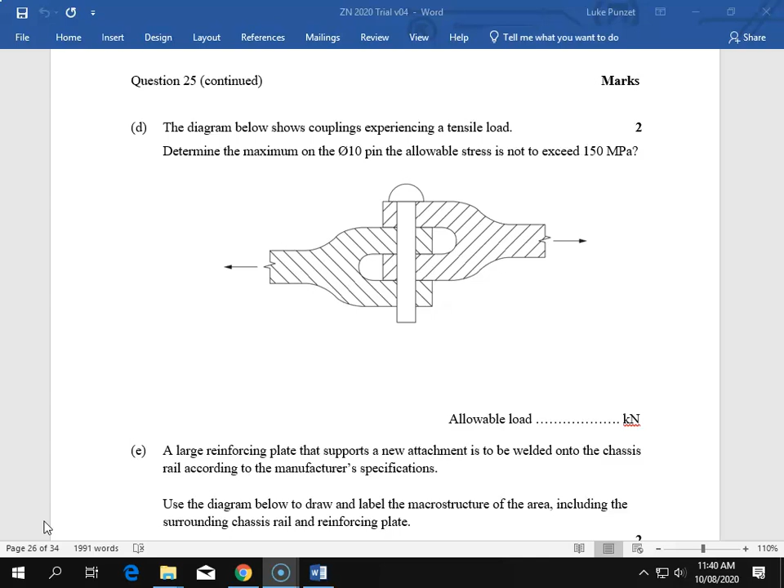Okay, so this question here was answered terribly. I gave you 1 mark if you did an attempt that was just not shocking. There was no one who answered this even close to well, but some people took an attempt at it, and I gave you a mark for labeling something, and I could see at least one happy face. Okay, so let's have a look at what the answer is supposed to be.

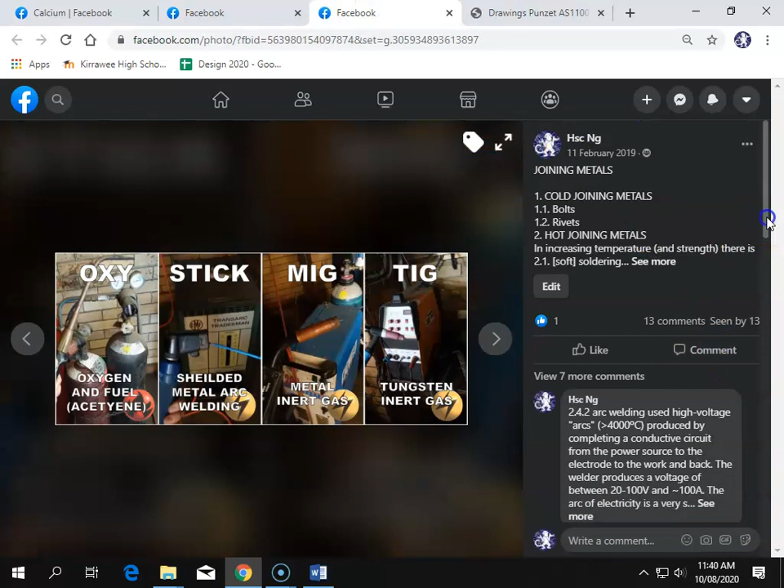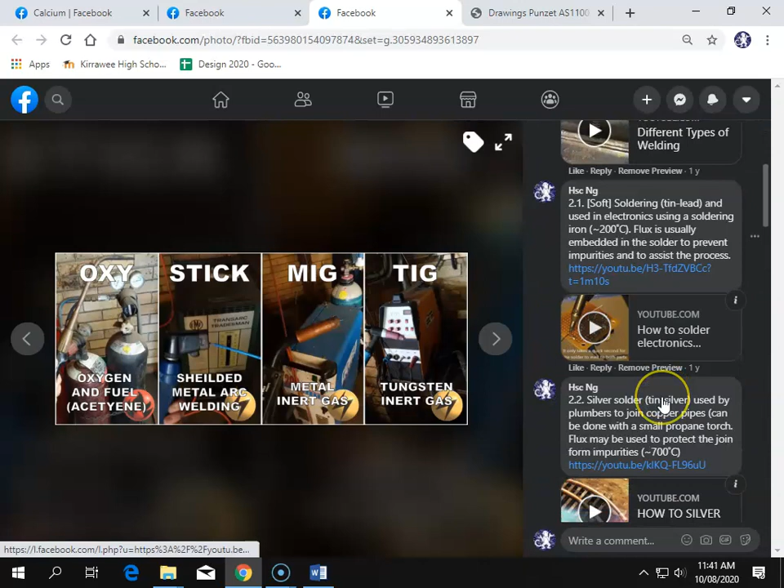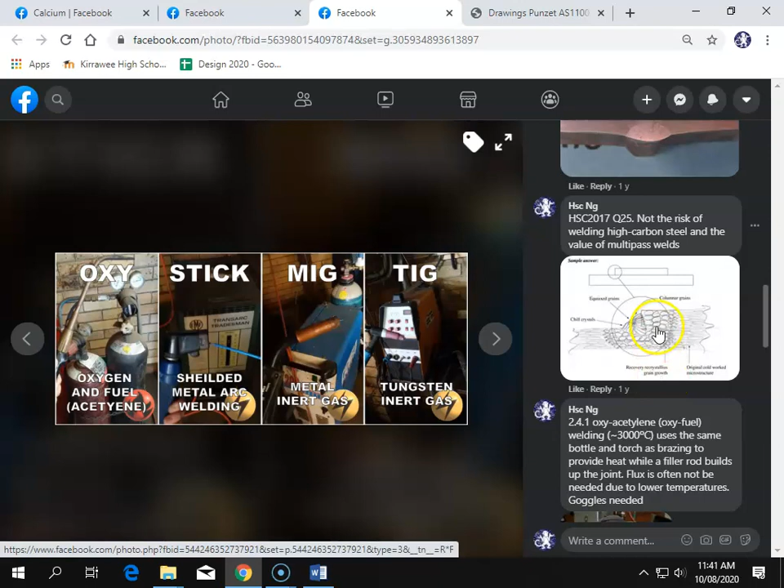Now, I'll be honest, I think I took this question off a recent trial, and I'd made a thing about saying that I wouldn't test anything that was not in the Year 12 textbook. And I did have this picture of a weld somewhere. I don't remember where, though. Let's have a look. There we go. Okay, so in the 2017 paper. I did check that it is in fact in the textbook as well. I should have got that open for you guys as well.

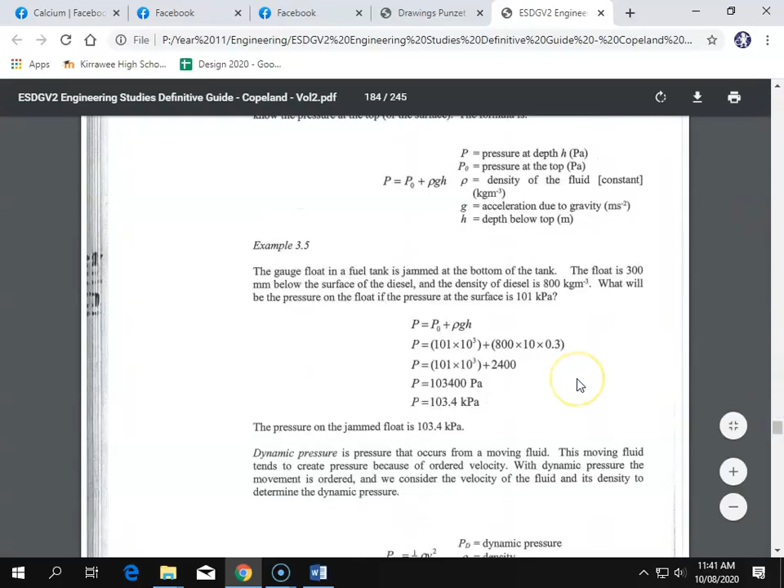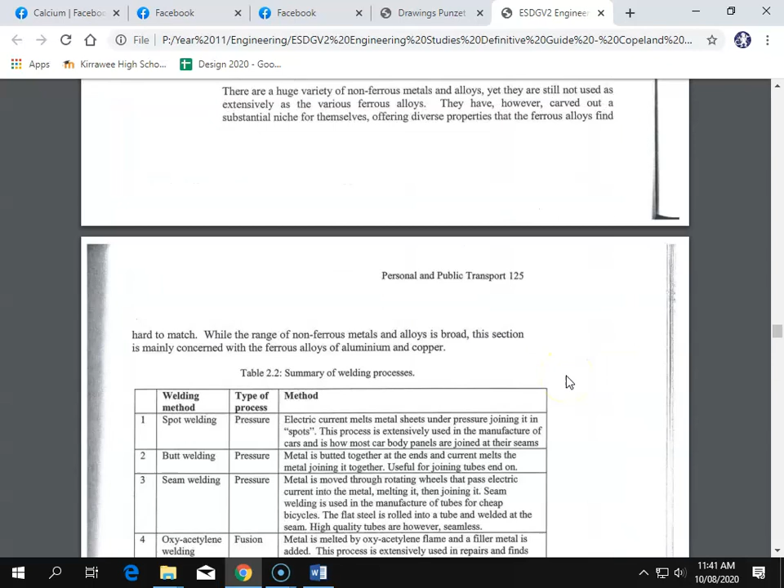Again, could take me some finding in the book. There we go. Okay, so I did check that it was indeed in the book. So let's see what they have to say here. Well, they have a figure, and they've described the figure. They said a cold rolled plate has been welded. Grain growth around the weld lowers the strength around the weld. Okay.

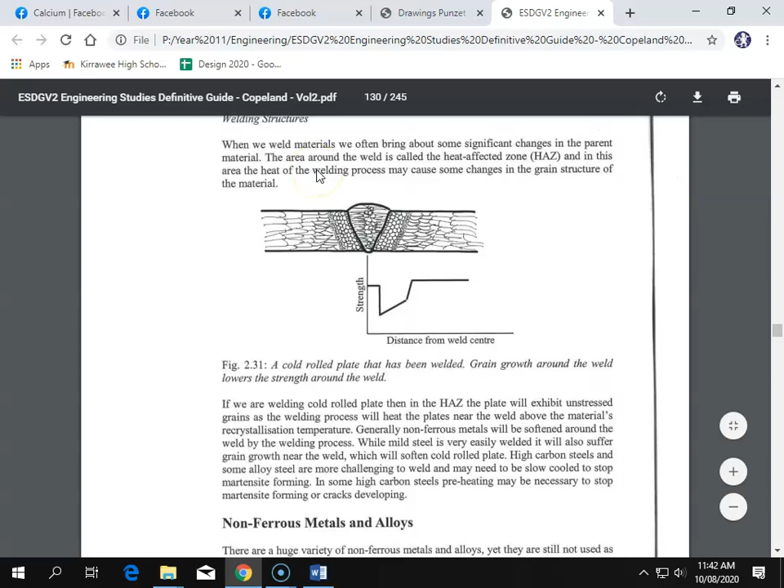So when we weld materials, we often bring about some significant changes to the parent metal. Right, so the difference between welding and brazing is that welding melts the parent metal. That's a great question. If you're listening to this in the future, that's a good question I might put in a future exam. What is the difference between welding and brazing? Right, welding melts the parent metal.

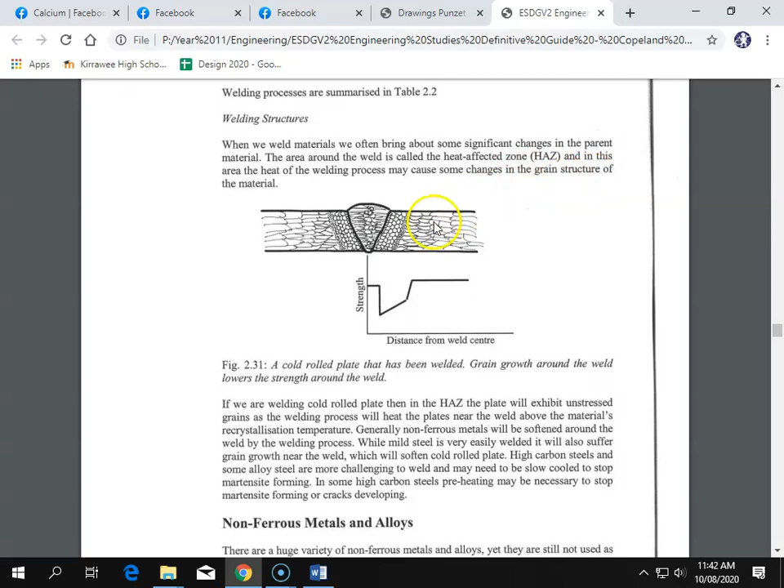The area around the weld is called the heat affected zone. In this area the heat of the welding process may cause some changes to the grain structure of the material. Okay, so if we are welding cold rolled plate, the heat affected zone will exhibit some unstressed grains, as the welding process will heat the plates near the weld above the material's recrystallization temperature.

Generally, non-ferrous metals will be softened around the weld by the welding process. While mild steel is very easily welded, it will also suffer grain growth near the weld, which will soften the cold rolled plate. High carbon steels, okay, I'll come back to that in a second. So what they're saying here is elongated grains are going to be stronger, right?

They're going to be stronger and harder because, what's the process, I think I've already said it, cold working, gives us elongated, stronger, harder grains. Yeah? That's a fair assumption, right? If you hadn't shown it as cold worked, this question I literally just took from the HSC, which we'll see in a second.

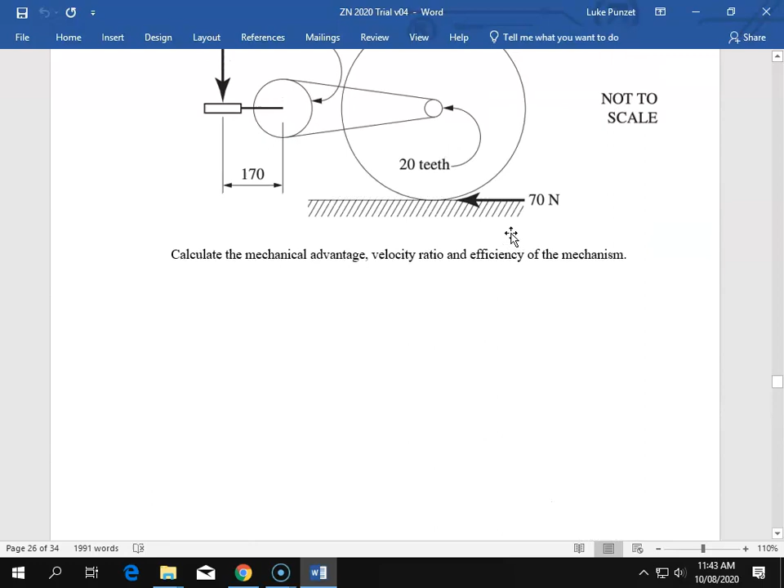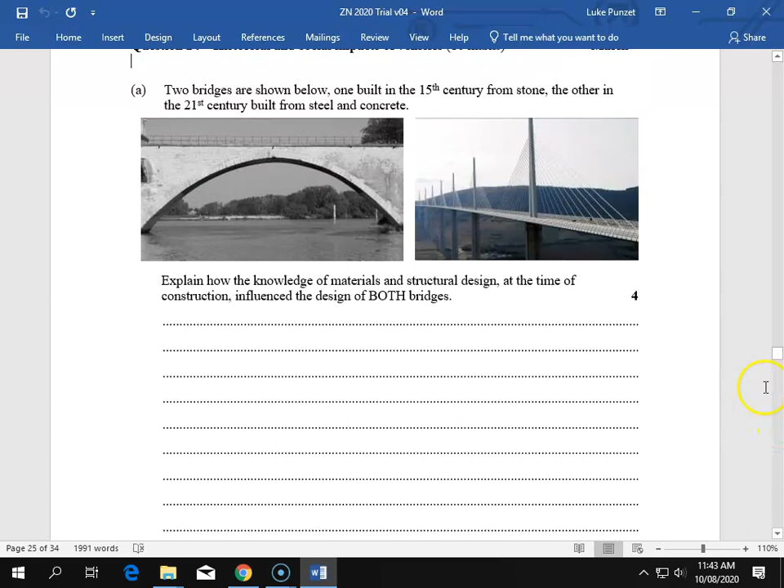But also, it says up here that, if it's related to the one earlier, it's probably forged, or machined is I think what they said. What did they say above? Chassis rolled. There we go. Mild steel rolled.

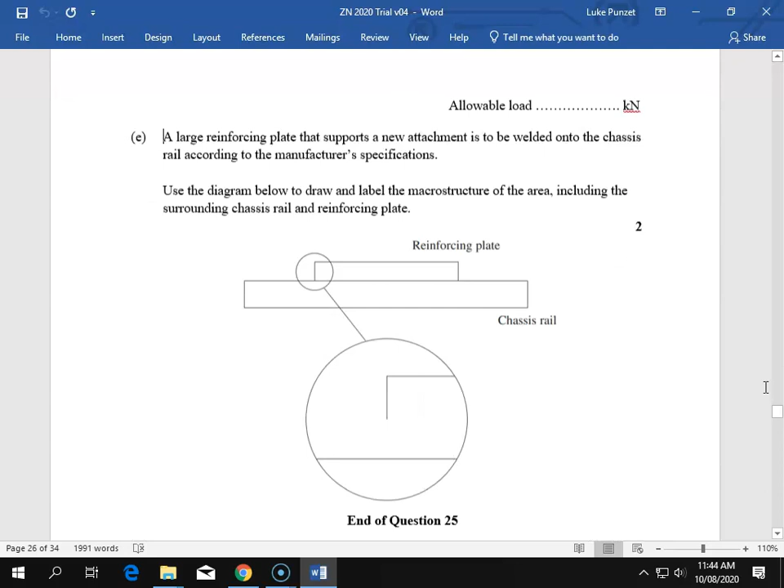Okay. A large reinforcing plate. Yeah, I mean it's not in the same question, so that's fair. Even then, it's still a reasonable assumption. If you hadn't shown it as elongated, I probably wouldn't take off the marks. It's reasonable to assume that most things are. If you showed it as normalized, that would also be fine.

Right, so if you said normalized grains, I don't really mind as long as you make a reasonable assumption. Right, this subject's all about reasonable assumptions. Keeping in mind that no one was even close for these marks this year. Maybe next year will be different.

Okay, so what we have here is equiaxed grains at the center of the weld, and then we have long columnar grains, column-like grains towards the end of the weld. This is because of the heat wanting to transfer quickly into the rest of the metal. The rest of the heat is being sucked away. Then we have larger equiaxed grains, smaller equiaxed grains. Then we have the unaffected metal.

Okay, we'll have a quick look at what the HSC answer says. So what it shows here is equiaxed grains, columnar grains with chill crystals on the outside edge. It has recovery crystal, I don't know how to pronounce that. So we have grain growth in this area. We have large grains becoming smaller grains, and then we have the original cold worked microstructure.

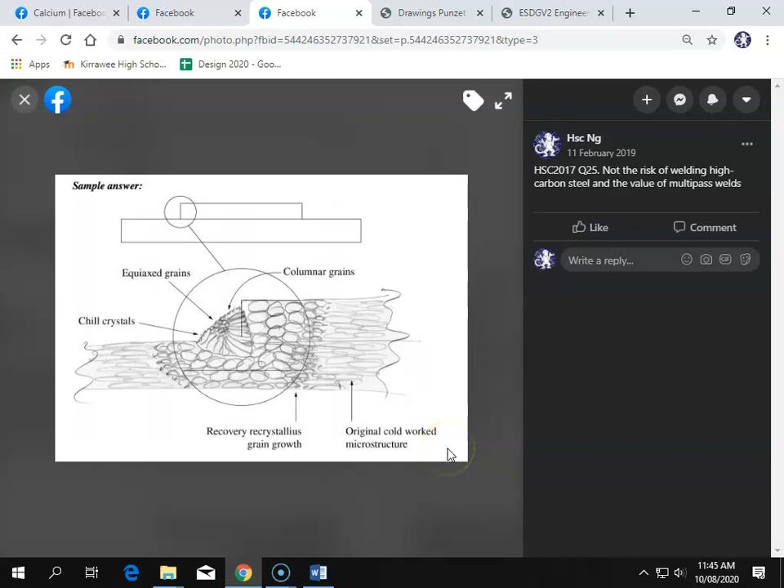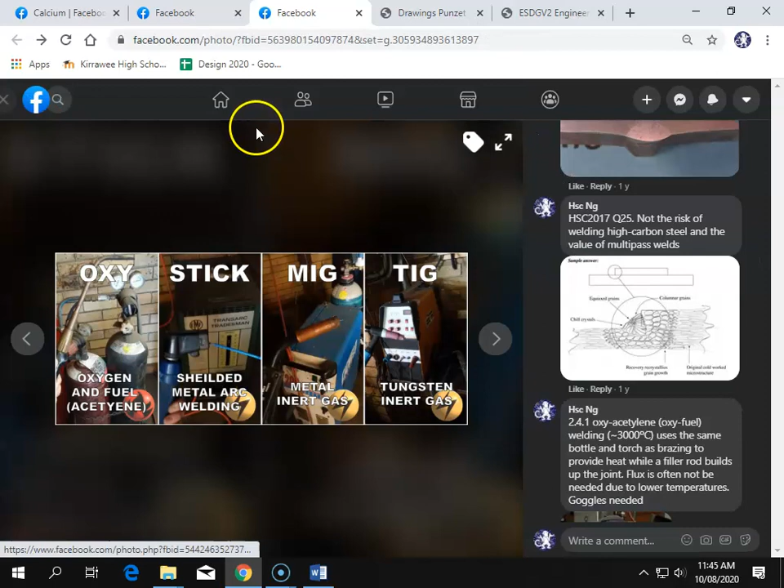So like I said, I took this from the question without any additional. Now, they did say in the answers for this question that you can have multi-pass welds. And I think in the past I've shown multi-pass welds. This is a photo so that you can see that this is legitimately how our grain growth looks. We have these long grains here.

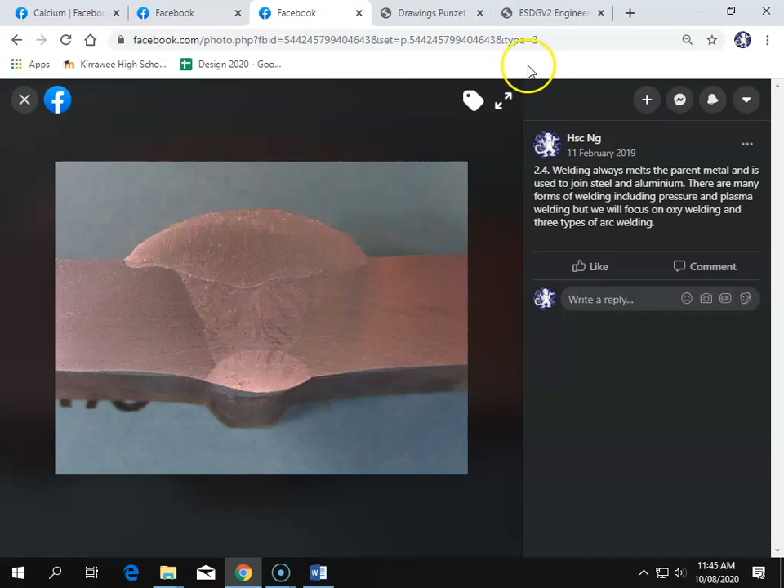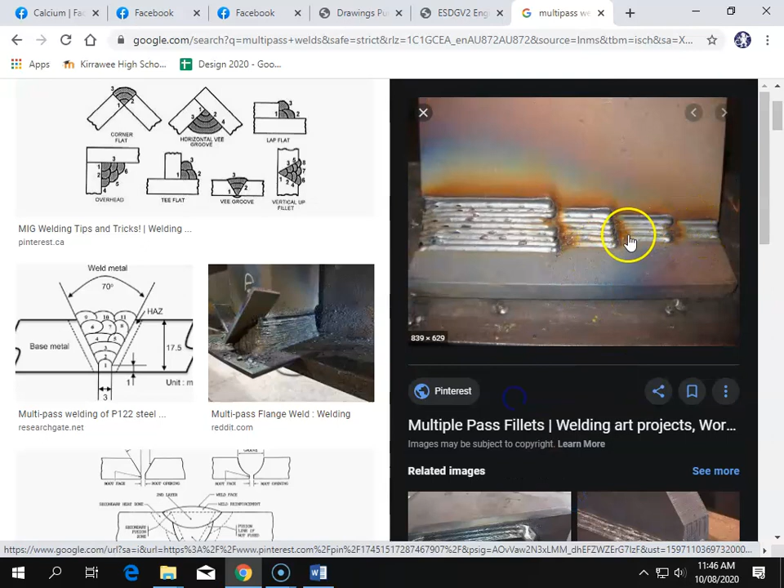When we have multi-pass welds, we can build up welds through multiple passes, there's lots of passes there in order to build up strength. Similar thing here. We can see multiple welds being put there to build up strength.

Now, before we move on, I wanted to talk about this. High carbon steels and some alloy steels are more challenging to weld, and they need to be slow cooled to stop martensite forming. Why is martensite bad? Super brittle. Yeah, so we deal with martensite by tempering. If we don't temper, then we're going to have problems. So this is why they say why.

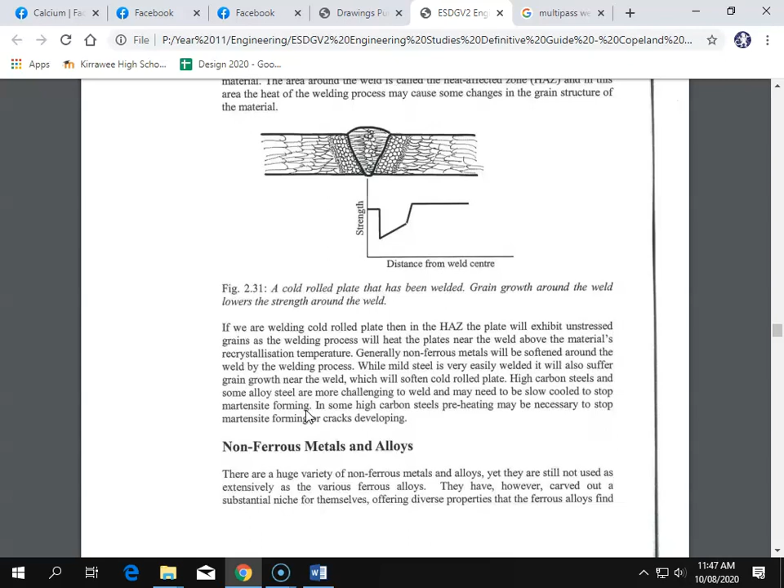For instance, there have been HSC questions or at least trial questions that have said, why would there be warnings on high carbon steels that say, warning, high carbon steel, do not weld? The reason is that high carbon steel needs to be welded very carefully to prevent martensite forming, as martensite is very brittle and can cause sudden catastrophic failure. In some high carbon steels, preheating may be necessary to stop martensite forming or cracks developing. Okay, so we can continue on with our exam.

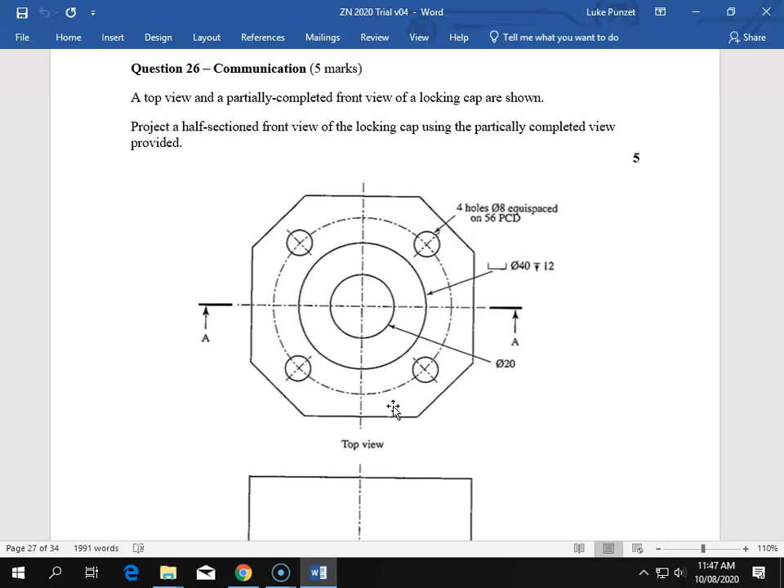A top view and a partially completed front view of a locking cap are shown. Project a half section front view of the locking cap using the partially completed view provided. So we can see here we have a locking cap, and what we're looking at here for details is, let's see if I can find this in the book.

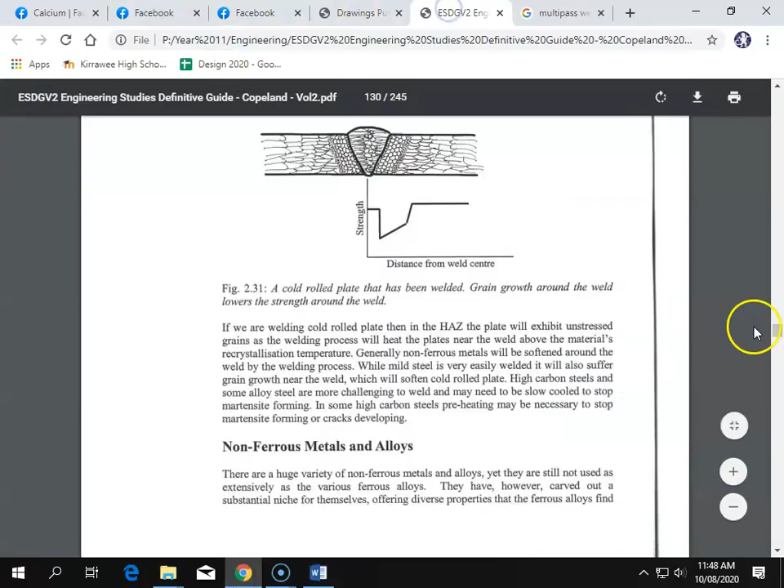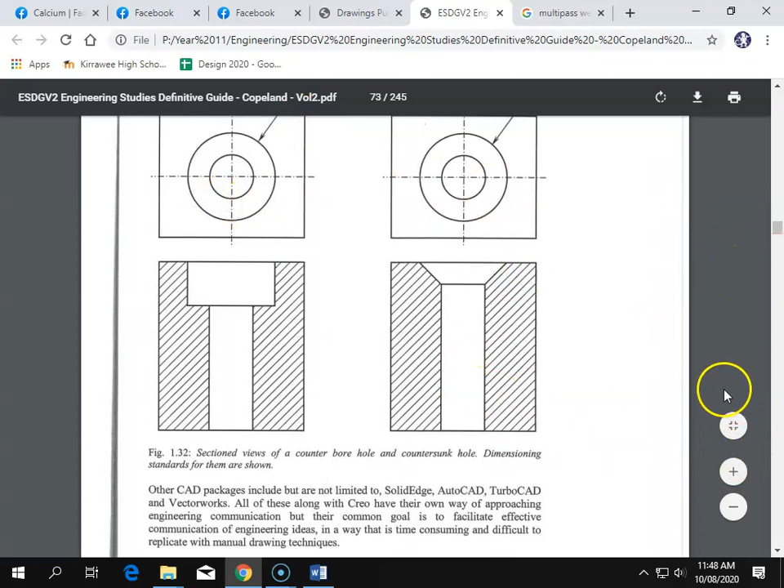This symbol here, this U-shaped thing, is a spot facing. I'll show you where we've talked about it in the book. It might take me a second. There you go. So this is where we talked about spot facings. In this case, the 15 millimeter diameter is the inner diameter. Then there's a spot facing, which is 30 millimeters diameter, that goes 15 millimeters down. And that would be how we draw the spot facing.

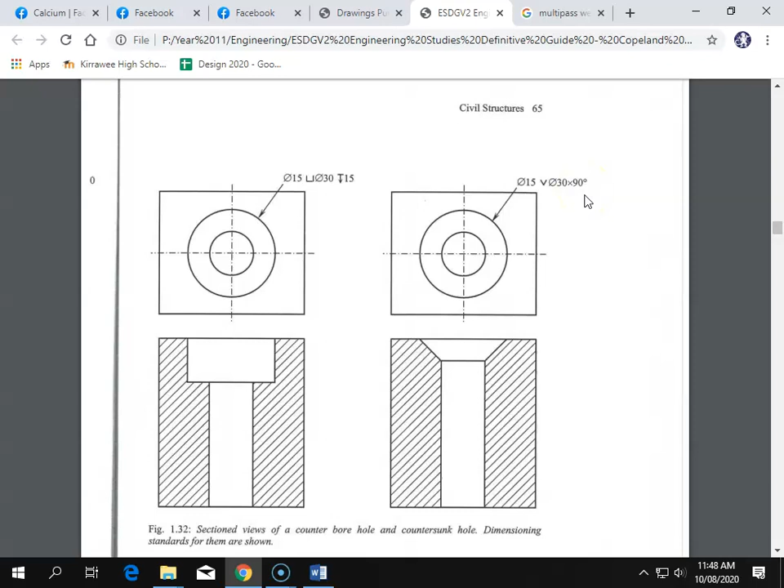In this case, we have the same thing except it's a countersink. The symbol for countersinks is this V, and we give the angle of the countersink, usually 90 degrees. Okay. Now, we don't need that anymore.

I included a photo before the exam. This is one that I had drawn up previously after using it in a different exam, where I gave the answers. I want to remind you that this was in the Punzet drawing book, where I said that I'd be taking drawings from it. If you did every single drawing in the drawing book, there would be no surprises for you. So let's have a look at what that answer looks like. I don't think new Facebook will let me.

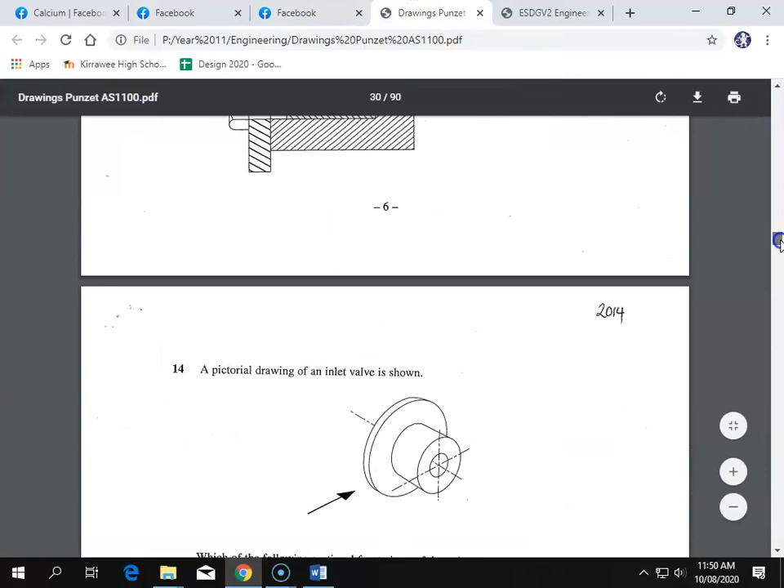Okay, so I have two questions. The question is, why do you only show half of it? And the other question is, why are you showing it through the hole? Why aren't you showing it through this center line as it's shown there? Right, and the reason for that is when we draw shapes, we draw them as interestingly as possible. We try to include as much interesting stuff as possible. I think we're right at the back of the book.

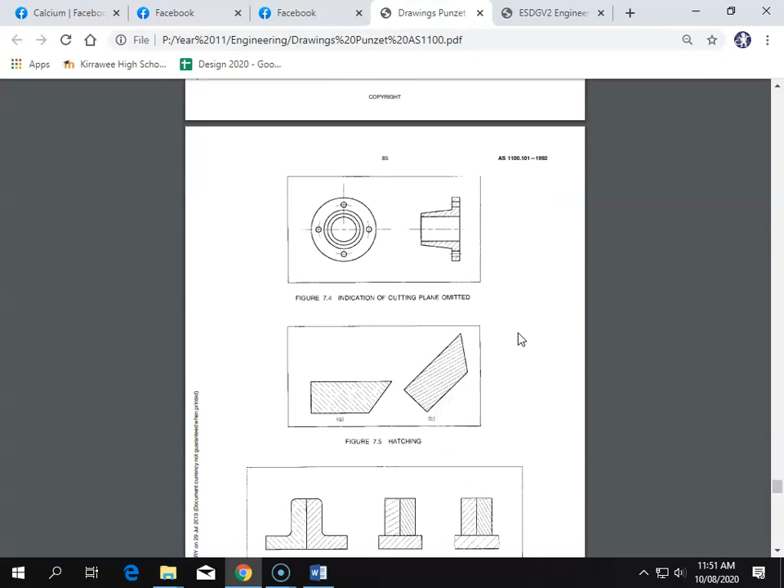Okay, so when I first went through my drawings book, this is my drawings book, right? It talks about in the Australian standard how we're supposed to section things correctly and draw things correctly. So first thing it says is draw at 45 degrees if at all possible. If you have different materials, draw the hatching in different directions. In this case, drawing at 45 degrees would be confusing. Don't do that, go the other direction. If you need to go at 60 degrees in order to not be confusing, do that.

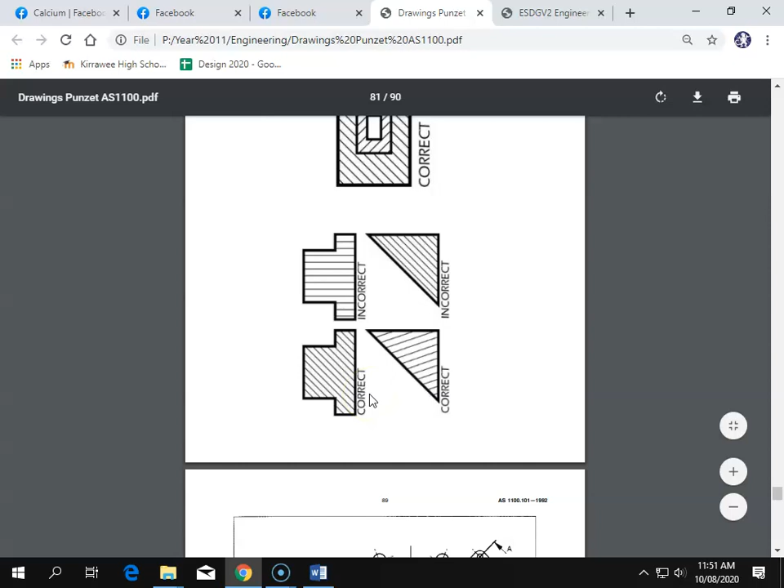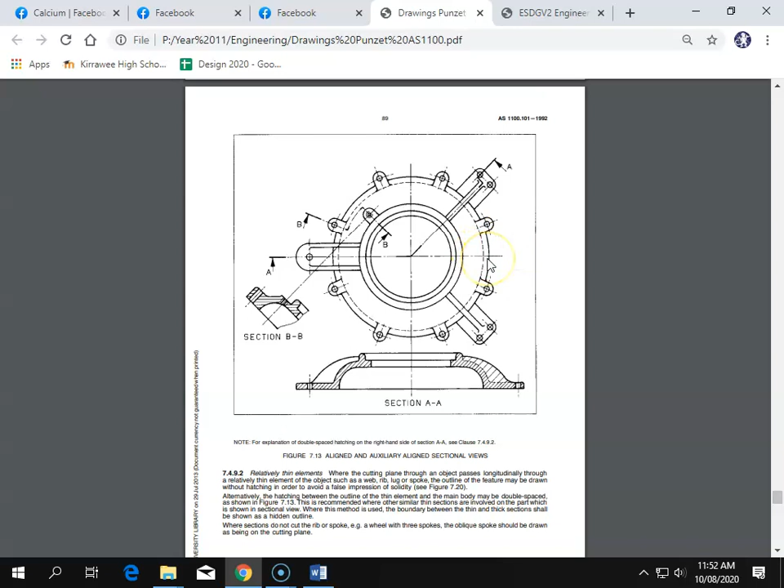Okay, then it says here, when we're talking about PCD, pitch circle diameter, we want to go in the most interesting way possible. We go through this circle, then we're moving along, we're going through this circle, and then we go back out through the web. Now, I don't want to give you too much information because I'm going to get you to go through this year's trial, but a thing that's important is you can see here that it's sectioned that web. There's this section here, the stiffener. Can you see how they've sectioned that stiffener?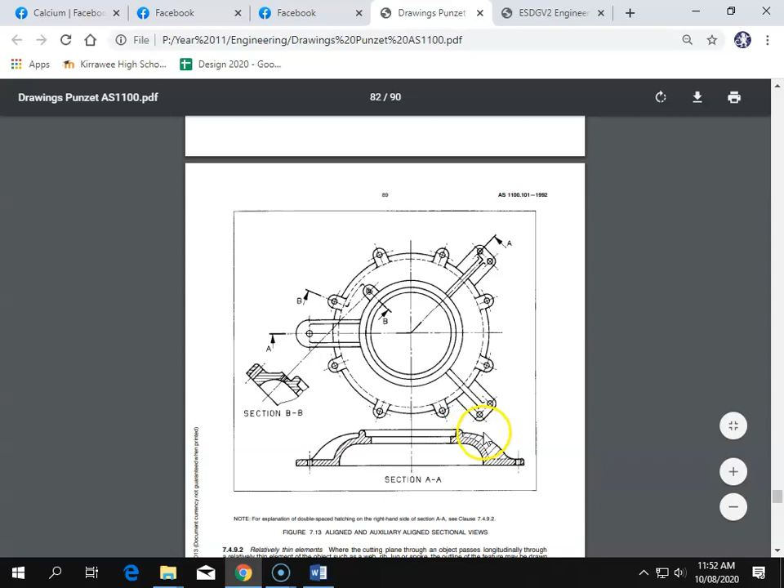Now, I know that the Australian standard says that you can do that. Somewhere in here I have a gif of Taylor Swift saying, don't do that like ever. In this subject, the markers will expect you not to section through webs. I know I've said that, but I just want to make sure, so I didn't use the question from the most recent trial. Instead, I went for one that I knew was in the book, which I said I would do.

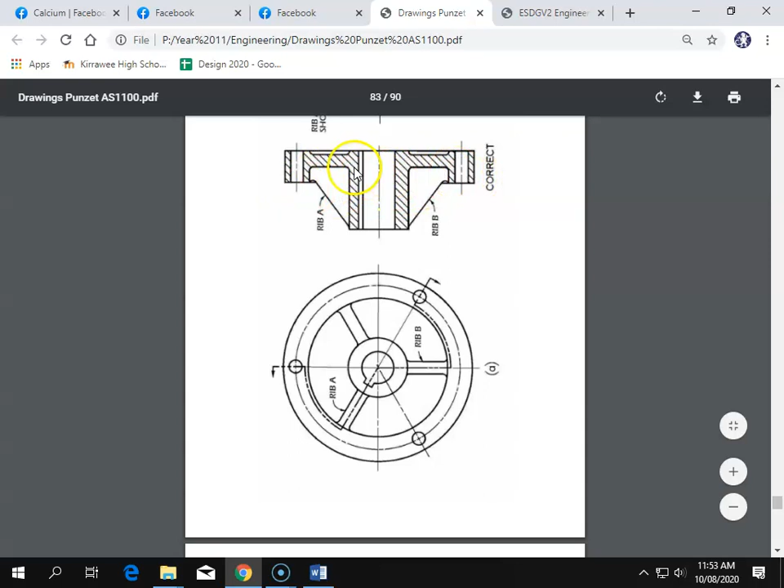Okay, so the idea is that we go through in this direction, and I'll show you what that looks like here. If we have this shape here, we go through the interesting stuff. We go through the circle, we go through the stiffener or the web, we go through the locking, I don't know, bayonet fitting or whatever we're going to call that. Again, we're going through the stiffener and then back through the circle. So we want an answer that looks like this and not an answer that looks like this. Don't do that, because that is confusing. That is going to make it harder for the people building your object to figure out what's going on. We always want to go in the direction of the interesting things.

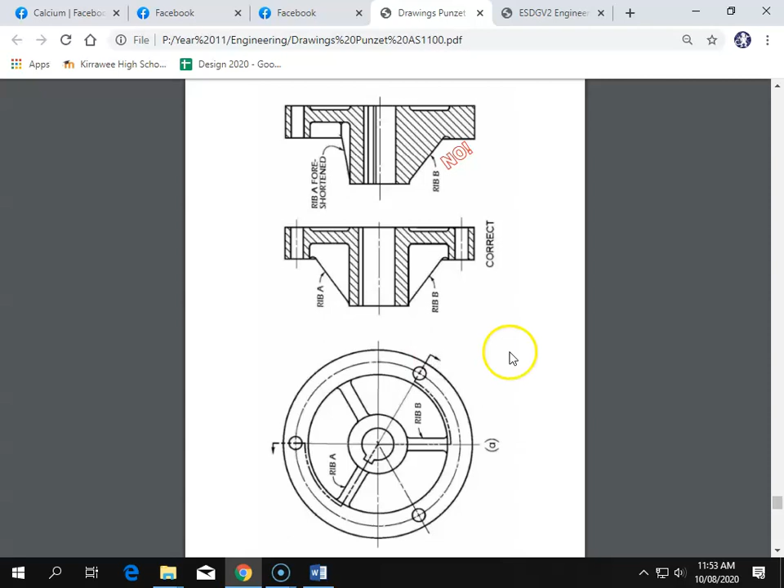Okay, so I can see this is something we're going to work on later. Everybody did this badly, which is probably an indictment on me more than anything else. I see two hands, just one second. To give you some reassurance, if everyone did badly, it effectively just reduces the value of the whole question. The rising tide lifts all boats. The same thing happens when the tide goes out.

Okay, who's going first with the questions? Go.

So, even though it says half section from A to A, we should just do it. I don't know, that just seems... Excellent. I'll come back to that. Okay, go. Exactly the same question?

Great. Okay, so what I wanted to talk about before I continue further on is, when it says half section, right? So half section, Nick. You said, if we section, we just cut across the whole thing, right? We just remove half of the whole object. If we half section something, it's as though we just remove 1/4, right? We just remove this 1/4.

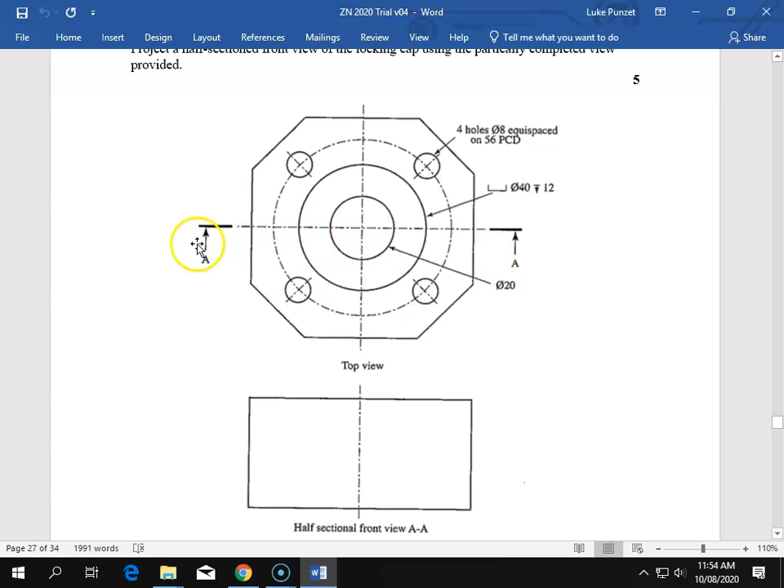Now, I just want to answer the question that was just asked. Even though it says section A to A, why did we still go through this circle? Because of these 3 letters, P, C, D. Pitch circle diameter, which just means that if something says PCD, we show it through that section, right? We rotate that part of the drawing through the section line. What does that mean? It just means that it's evenly spaced on the diameter. So it's rotationally centered. It's got a rotational axis of symmetry, and in order to reflect that, we show it in the section even if we don't cut through that section.

So is that 56 millimeters from the center? Yes, that would be 56. Yes. Without getting a ruler to confirm that, the diameter is 56. Sorry, so yes, it's 28 from the center. Yeah, so because this is 40, that looks like 56. That looks about right. Okay, you had a question.

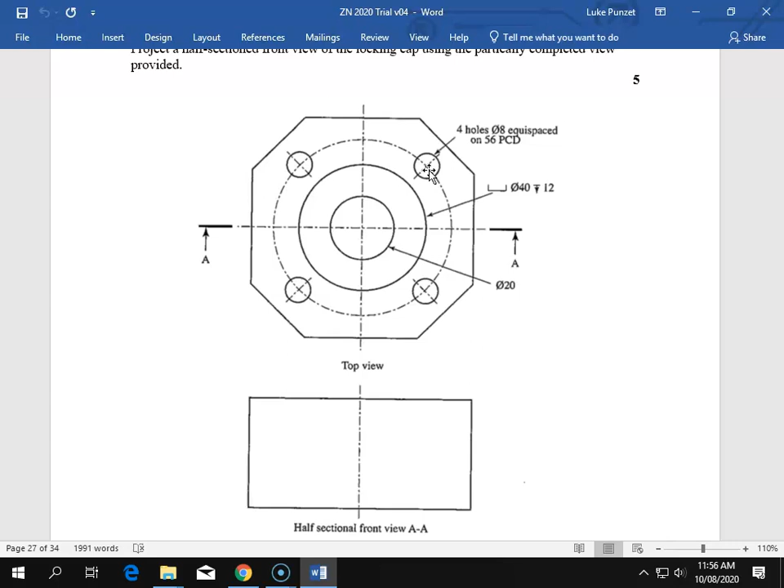Answered? Okay. I actually didn't really get how there's 2 circles and stuff. Is that just different? Okay, so I will show you now a picture of what this looks like conceptually. It looks like that. It's an octagon with a dip and then a hole drilled all the way through. And so what I talk about with PCD is that circles should be shown. So any sort of holes that are drilled, we typically will be PCD, where we show them through the section even if we don't cut through them. Similar thing for webs and stiffeners.

Now, generally speaking, like I said, I think the highest marks I gave was 3 marks. What am I looking for? Even if you had got that wrong, you would have only lost 1 mark. What I'm looking for is, first of all, that you showed a half section and not a full section. I'm looking for the fact that you knew how to hatch, right? So you're drawing lines that are lighter. I want to see a difference in line width, and I want to see it at a consistent 45 degree angle. Now, if you didn't do it at 45 degrees, I wouldn't necessarily have taken that mark off. What I want to see is a consistent angle with consistent spacing at a lighter line. So that was a mark.

I wanted to see a center line. Pretty much as long as you drew a center line somewhere on the object, it showed me that you understand that you need to draw center lines. So collectively, that's 3 marks straight away that I was looking to give. Just to go back: half section, if you just drew a line on one side and some amount of sectioning on the other side, boom, that's 1 mark. If you showed me that you knew how to section properly with 45 degree lines, even spacing at a lighter line width, that was another mark. If you drew it with a center line, that was another mark. 3 marks straight away.

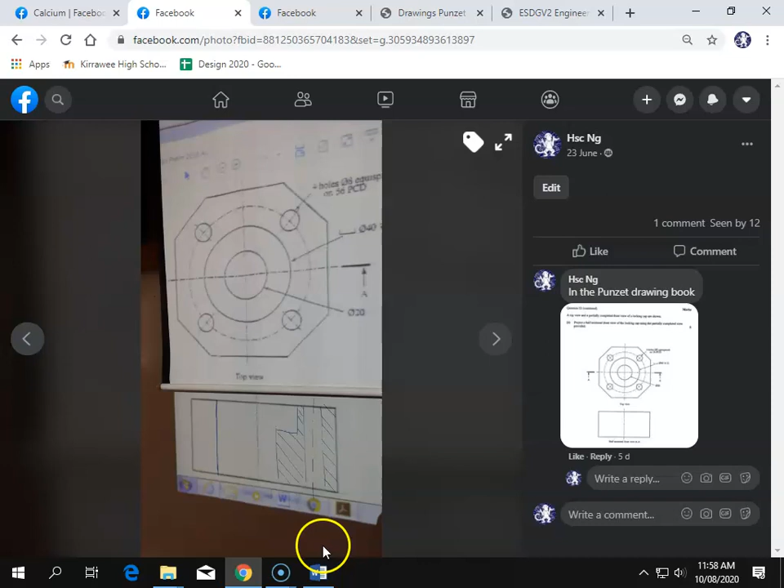Then after that, what am I looking for for the remaining 2 marks? I'm looking for the spot facing and I'm looking for the PCD. Yes. Would you do a center line on the other side? Yes. So I didn't in this case, but yeah, there should probably be a center line through there. So I think that's identified two things I got wrong. Now, like I said, I don't think this is an HSC question. Otherwise, I would have included the HSC answer here. With trial questions, it may take me a while to find the trial answer.

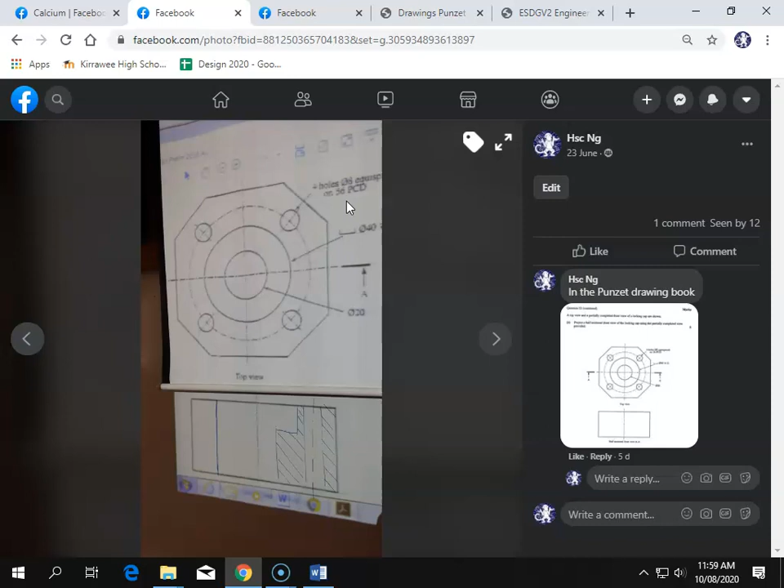Yep. What's up? You're talking about rotating the holes, right? Around the 56 diameter. Yep. Why would you just rotate the holes and not the rest of the octagon as well? Because the holes are what are listed as PCD. So it doesn't really matter where the holes are at all. It's the fact that the holes are labelled as PCD. Okay. Yeah? Okay.

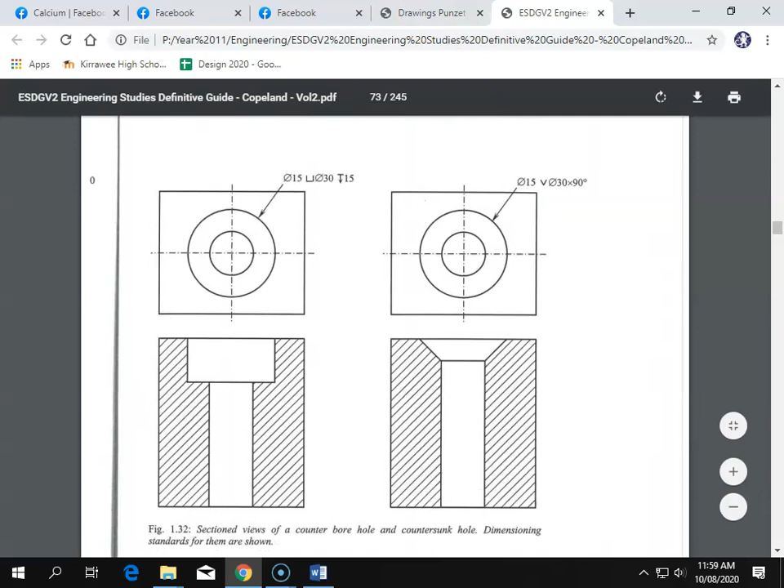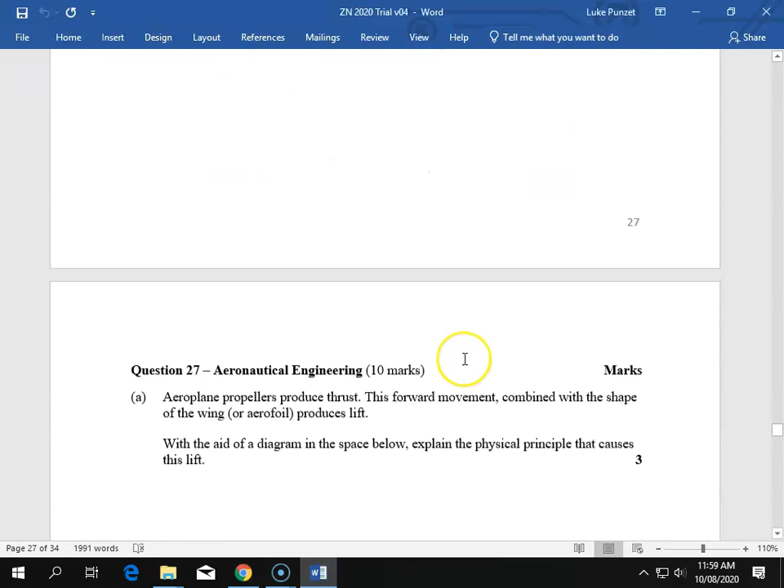Okay, so what are we going to next? Okay, we're on to aeronautical questions. Okay.

Aeroplane propellers produce thrust. This forward movement combined with the shape of the wing, aerofoil, produces lift. With the aid of the diagram and the space below, explain the physical principles that cause this lift.

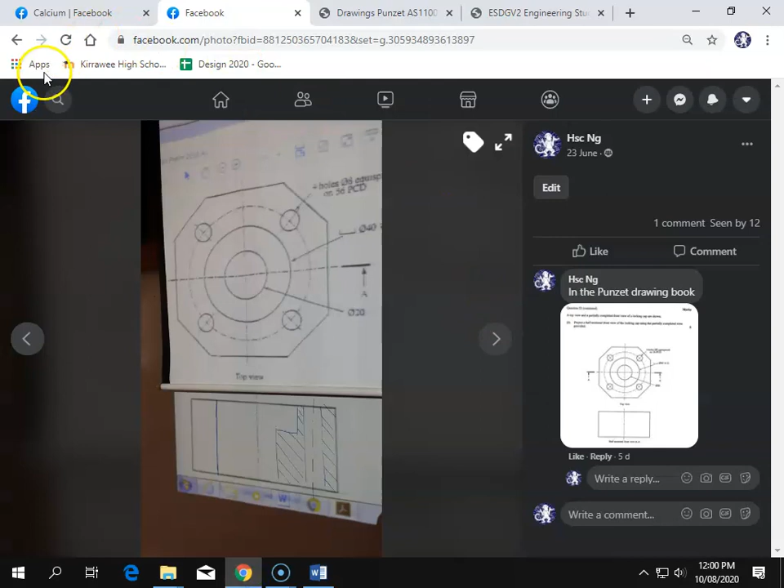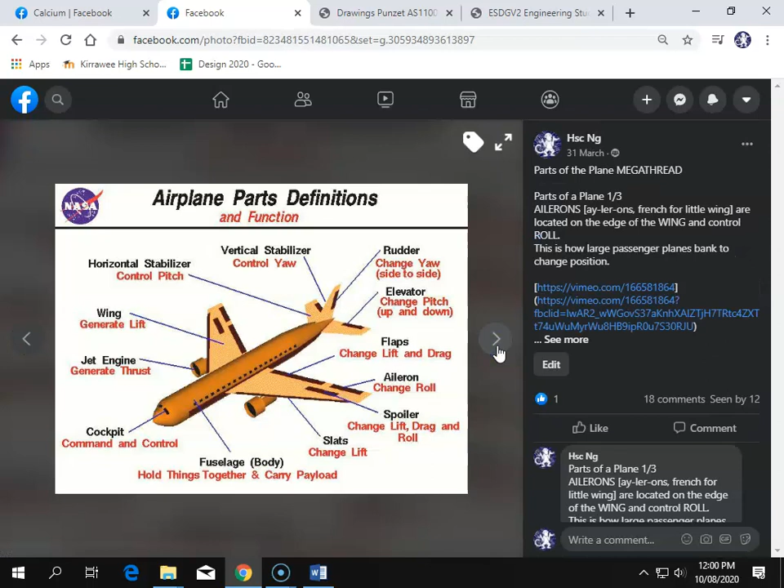Okay, so I'll show you where I discuss this in our Facebook page. There's got to be a faster way of doing this. Here we go. Took a while as we flashed through some of our history. Okay, so let's have a look.

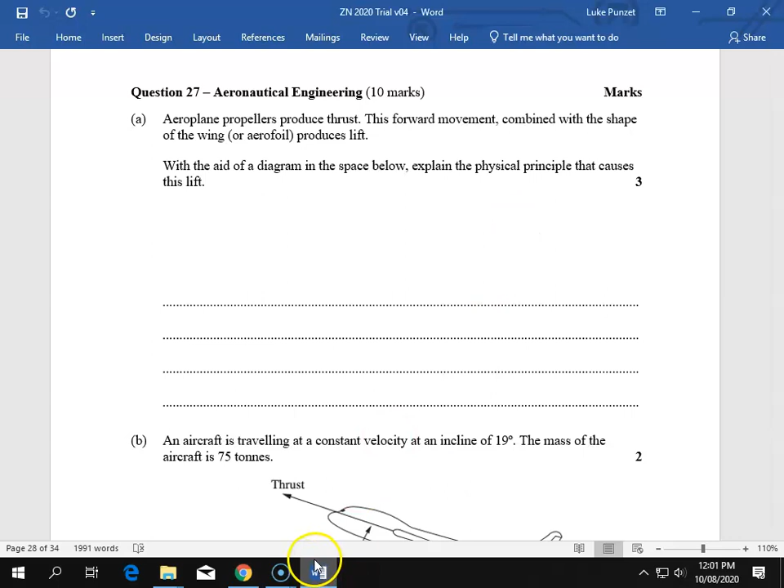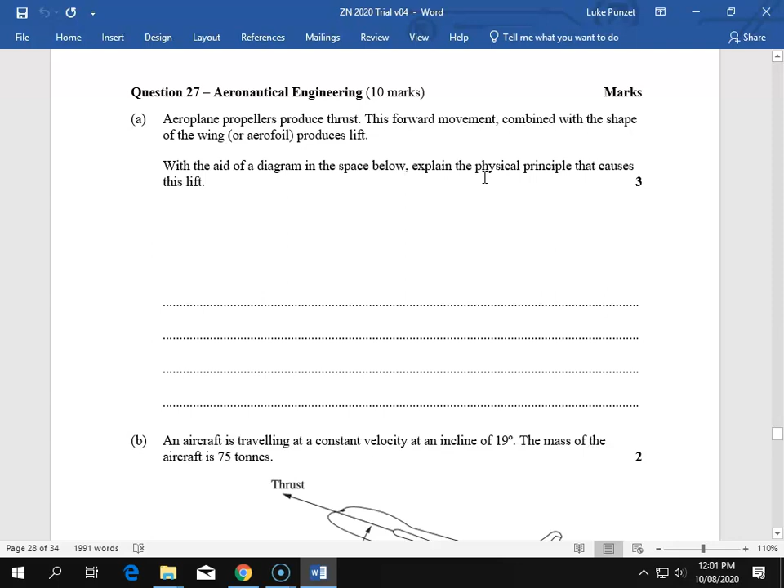What am I looking for here? How many marks is this? 2 or 3? 3. Okay. So I want a labeled sketch, right? Now the labeling could be as little as LP and HP for low pressure and high pressure, right? That's the minimum I'd need. But as we have a look, these are the answers I will accept with various degrees of caveats, right?

First of all, if you said the wing generates lift because the air above the wing has lower pressure than the air below, pushing it up, yeah. Draw a picture, draw the low and high pressure, I'd probably give you a mark for that, right? It's feeling pretty generous. If you said Bernoulli's principle means that the air above is going faster, which means that there's lower pressure than the air below, generating lift, I'm okay with that.

Then, a better answer even still is the angle of the wing means more air hits the bottom of the wing, right? And Bernoulli's principle means that the air above is going faster. This results in lower pressure above the wing than below, which generates lift. And the best answer would say the conservation of mass, momentum, and energy causes the wing to generate lift. More air hits the bottom of the wing. Bernoulli's principle means that the air above the wing is going faster. This results in a lower pressure above the wing, higher pressure below, which generates lift.

That's the best answer. Now, if you just wrote the conservation of energy and momentum results in the wing going up, I probably gave you a mark for that, but I would have written that this is risky and that the HSC marker might not be as generous as I am, right? I think that's pretty much what I wrote.

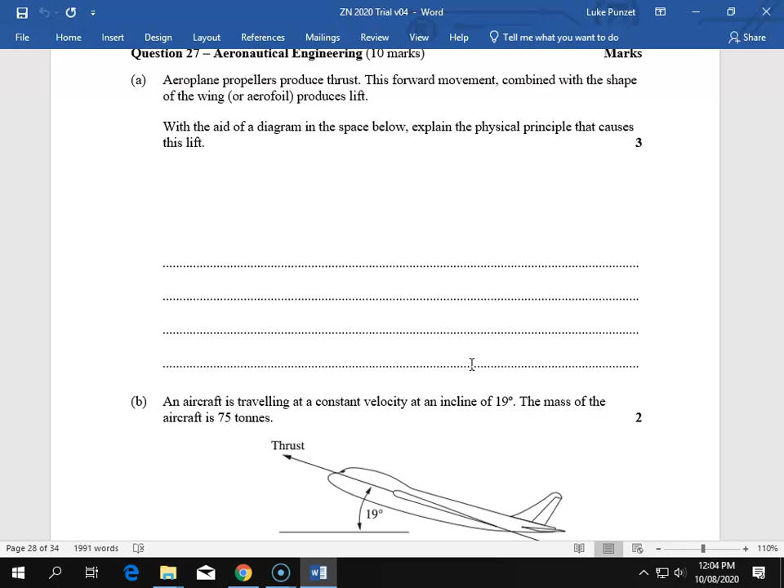Aircraft is traveling at constant velocity at an incline of 19 degrees. The mass of the aircraft is 75 tons. Determine the magnitude of the lift in this situation. This is the easiest of these sorts of questions. I'm pretty sure this is a question directly taken from our album of questions.

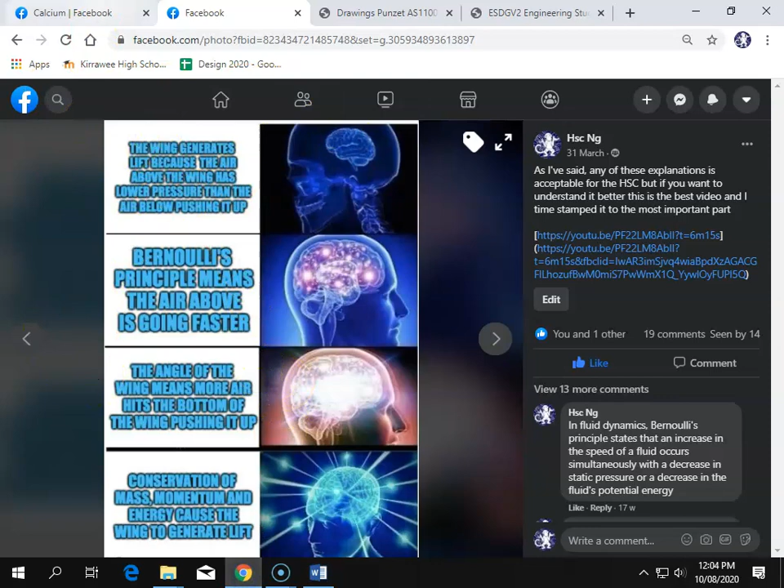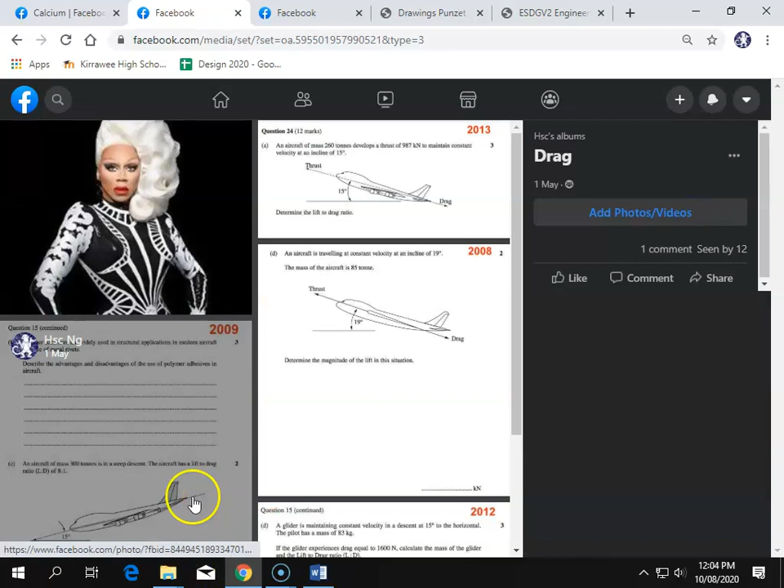Oh, this is the way to do it. Just leave another window open. Go to albums, and in our albums we have drag. And let's see which question. I may have changed the numbers. There we go. I did change the numbers. In the original question it was 85 tons. I changed the question for you guys just to make it a little bit more interesting. So let's have a look at my working out.

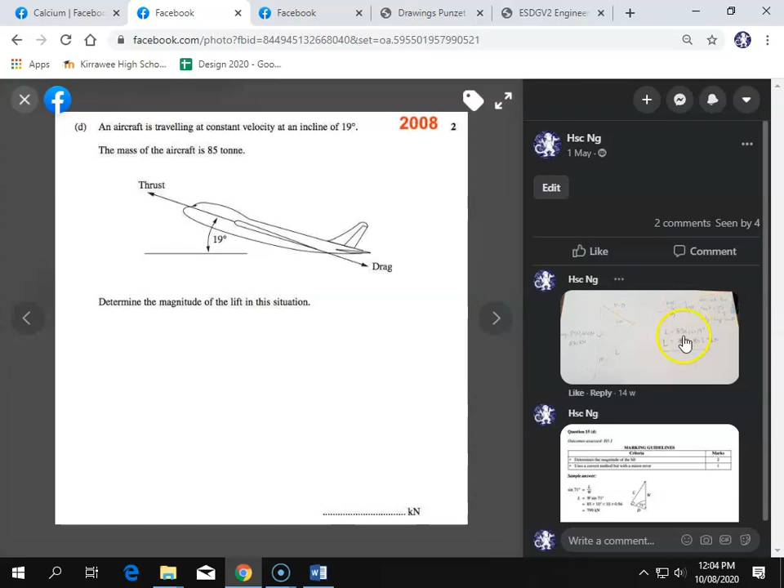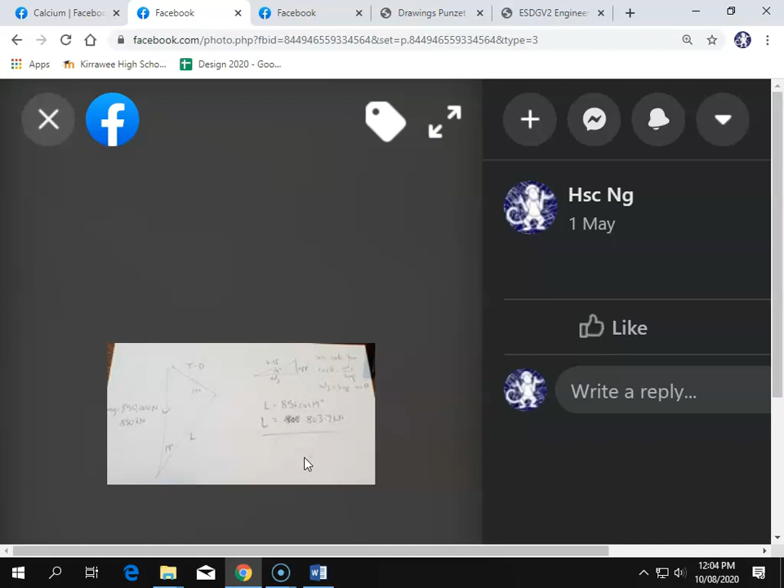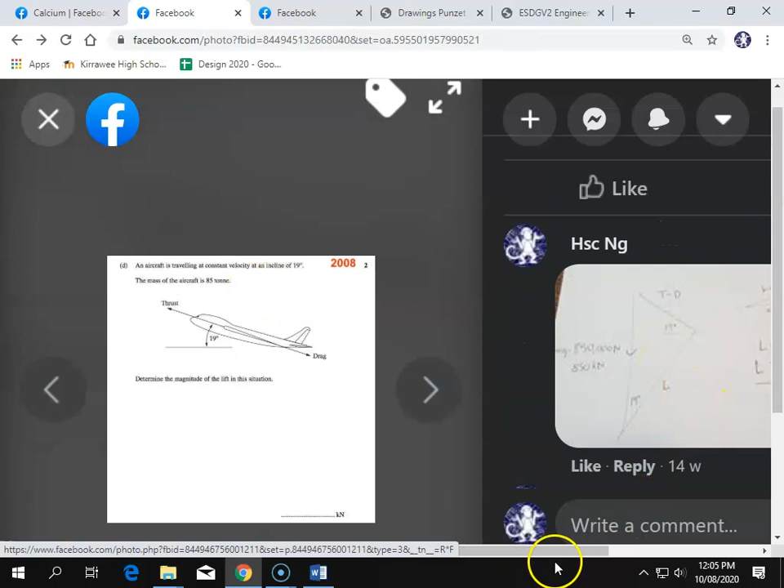Oh, super clear there. Okay, so I draw a diagram like this. Oh, this is such a bad angle. We're just going to go to this one. I don't like that drawing though. Why don't I have a better photo? Okay, it actually looks better like that. Yes, we good? Yeah. Yep.

Okay, we draw a right angle triangle. The hypotenuse is vertical and down, right? The next longer side is lift, pointing up. Then the smaller side is thrust minus drag. Because the angle of attack is 19, that means this angle here is 19.

This angle up here is 90. I'm not going to go through the geometry on that one. You just have to trust me at this point, right? Corresponding angles, alternate angles and parallel lines will help you get halfway there. Now, if you know that value, you're just using trigonometry to find it.

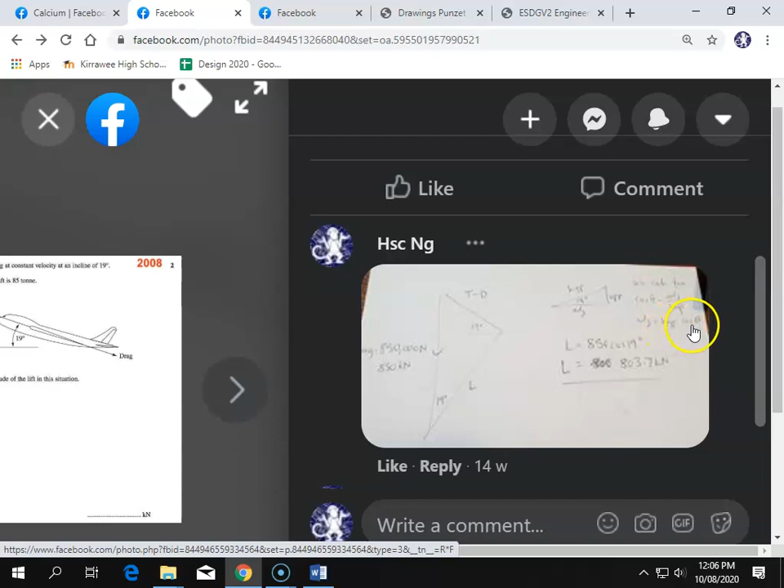We want to find, in this case, the adjacent side. Right, we want to find lift, which is adjacent. So we can say that adjacent equals the hypotenuse times cos theta. In our case, we're going to use different numbers. How much is 75 tons in kilonewtons? 750 kilonewtons, right? So it's 750 kilonewtons times cos 19, which gives us about 709.

The number has to be close to, but less than, the hypotenuse, right? Simple estimation should give us that. We look at a triangle and say, well, it can't be bigger than the hypotenuse, and it's going to be close to the hypotenuse. One place I saw people lose a mark was because they forgot to multiply by gravity. Otherwise, most people got it or they had just no idea.

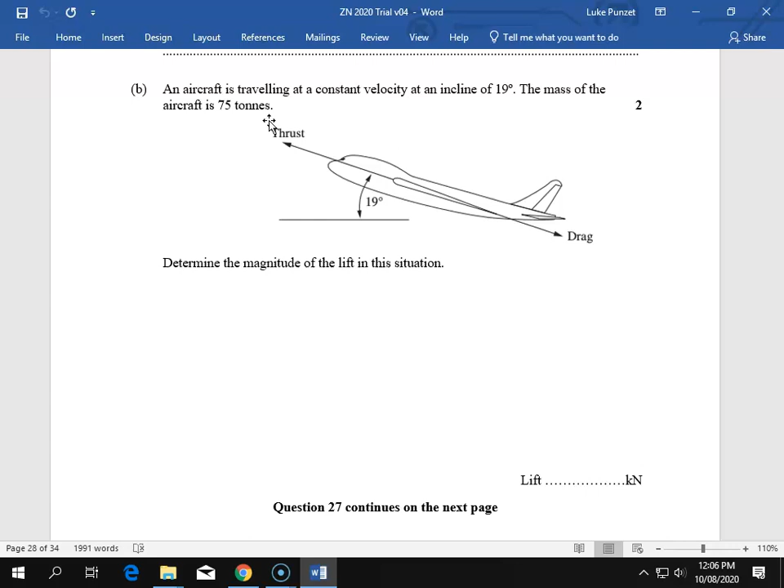I saw a lot of people write the tan formula, which is similar to this formula but different, right? This is just its own formula. So okay, easiest of the questions in that set of practice problems.

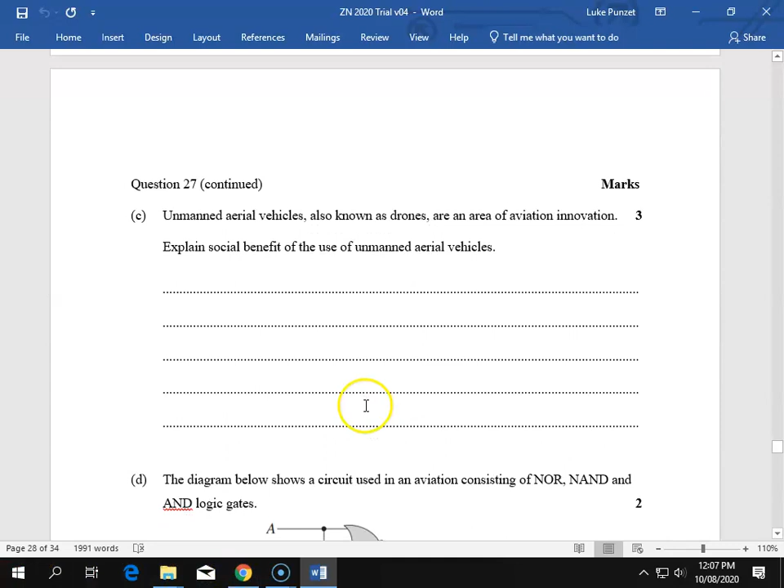Okay, question 27. Unmanned aerial vehicles, also known as drones, are an area of aviation innovation. Explain the social benefit of the use of unmanned aerial vehicles. This is an original. I thought it was a pretty reasonable question. For 3 marks, I just want to remind people that explain means cause and effect, right? How and why. So if you just listed 3 things, firefighting drones, tree planting drones, search and rescue drones, I can't give you 3 marks. You have to show me cause and effect.

Now, 3 marks are asked for here. If you give me no cause and effect, but you list 3 things, I'll just give you 2, right? For the 3rd mark, I need cause and effect. Now, you could take one thing, say firefighting drones provide both a social and environmental benefit in that they prevent the destruction of property and the destruction of natural habitat and ecosystems. I would probably give you 3 marks for that.

The reason is, even though you've only picked one thing, you've expanded it and given me 2 different reasons. Even though I've asked for a social benefit, you've given me an environmental benefit, but environmental conservation has its own social benefit. People can go hiking and see the koalas. Or if you said delivery drones can provide life-saving medication to people in remote areas, and also convenience so people get their Amazon Prime purchases sooner, that's one thing with 2 very different social benefits.

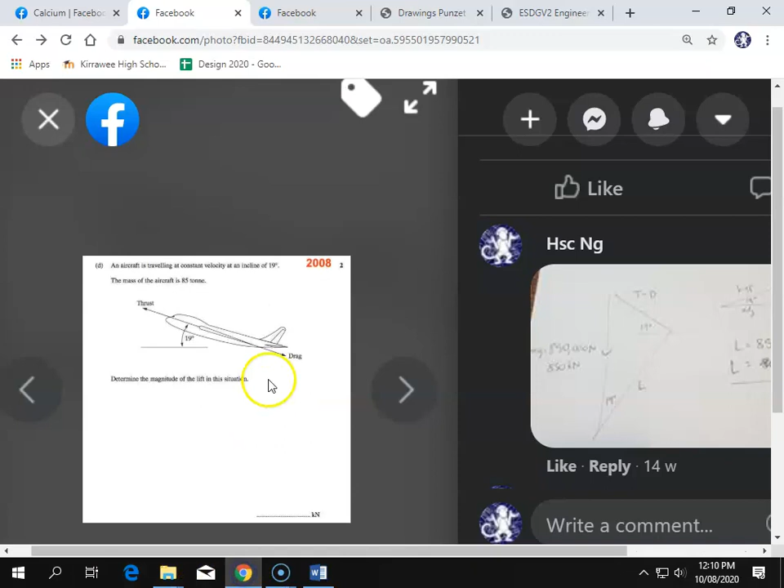Close. Very, very close. Hey, Nick.

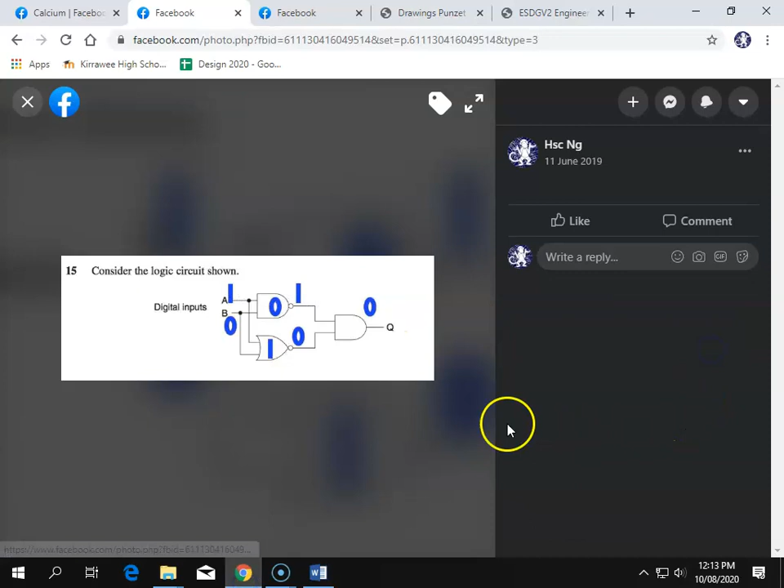The reason you have to do it 3 times is because this one and this one are the same. To demonstrate that they're the same, this and this are the same. Yeah, the same outcome. So if you're aware of that, that helps you to speed up that third one. I think even then it's pretty reasonable for 2 marks. I honestly believe this is based on a HSC question, just maybe a more recent one that's in our book.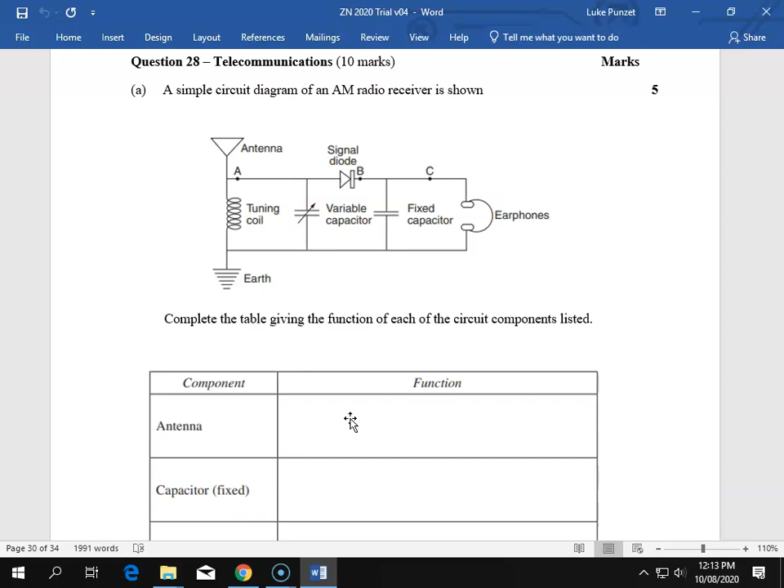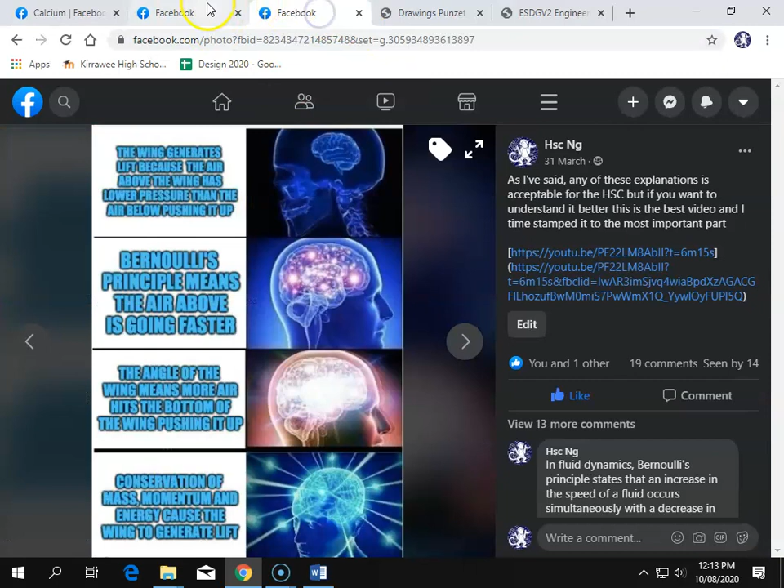Okay, sorry for clapping, this is definitely a question that was from a past HSC. So let's have a look. We may not have talked enough about drawing recently, and that's on me, an indictment of my teaching. But we definitely talked a lot about this in our telecommunications. So if we look at our telecommunications here, we have a question from the 2019 paper, full working. We have the snippet from the book that relates to it, and we have a very similar question.

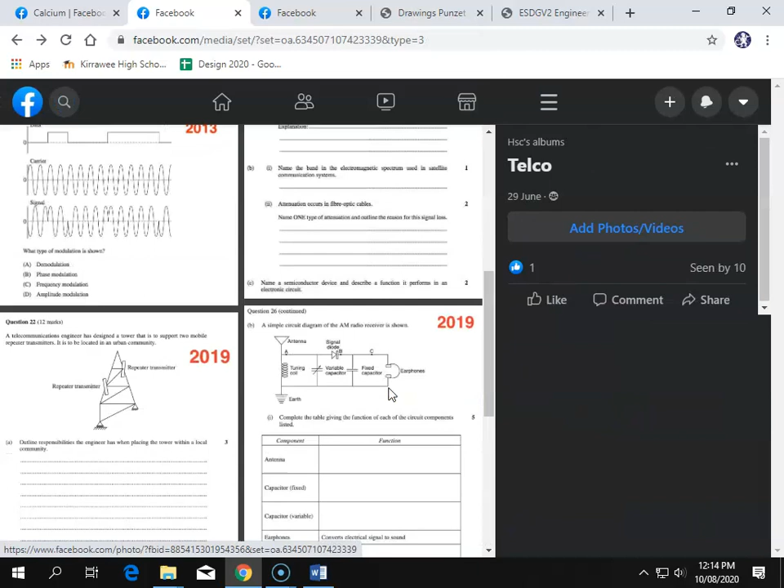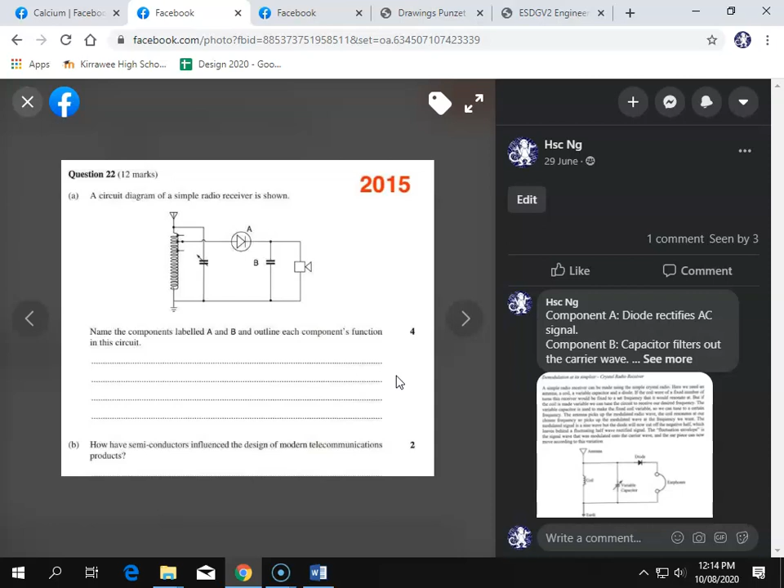When I went to marking, I don't know if I'm allowed to talk about marking that much, so I won't say too much on a recording. But there were some people who were upset about seeing this question on the 2019 paper, right? And I said, nah, at this point you had to be aware of it because there was a question in 2015. The 2015 kids, they had a reason to be upset. These days in 2019, not as much reason. You should now be expecting this is the level of knowledge that's expected for the HSC. Okay, so let's have a look at it.

The antenna. Well, I'll open the answers so you can see the answers, but without looking at it, the antenna picks up the signal, right? If you just said antenna receives signal, I'm happy with that. Capacitor, the fixed capacitor smooths out the signal, right? That's the answer I would give.

The variable capacitor tunes the signal. Now, if we read the answer, it says, works in tandem with the coil to have the circuit resonate a signal frequency. This allows the circuit to detect a single frequency band instead of all possible frequencies. That's a great answer. Me, I would just be happy with if you wrote tunes the signal. I'm giving that a mark.

Okay, earphones converts the signal to sound. Earth acts as a negative pole. Okay, so if you said it acts as a ground point to complete the circuit, happy with that. Gives the electrons somewhere to flow to. I'd give that. I get quite a few range of answers.

If you said that the Earth exists there as a safety feature, I can't really give that, right? And I say that look, that is true, I guess, if we're talking about large scale electricity, but often we're talking about things that run off 1.5 volts, and even then, it's still not the purpose in this diagram.

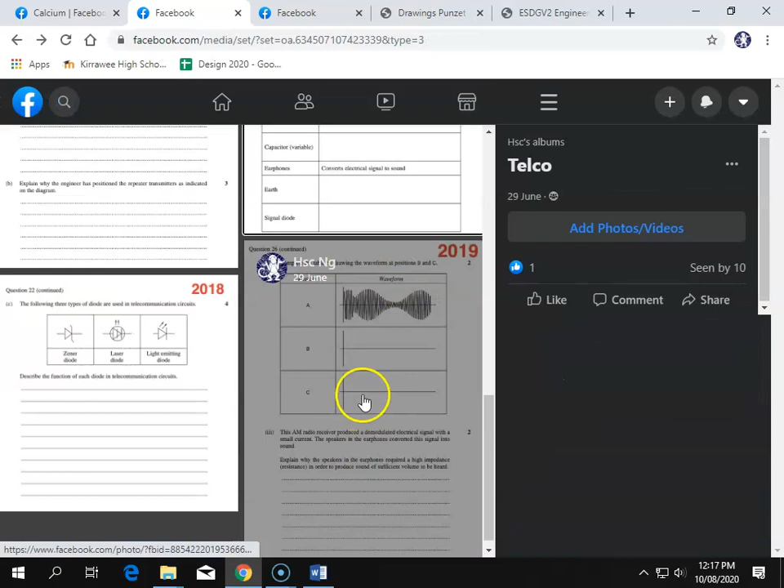Okay, now let's have a look at what that looks like through the different ranges. Now, I thought it would have been cruel to have given you this question because this was a hard question, right? I felt as though the kids who got this one last year, they deserve to say, oh, that one was trickier than I thought.

Now, we talked quite a fair bit about this. I thought I actually had videos, so obviously they never made it to my Facebook. If someone reminds me, I'll get some videos where they talk about both receiving and transmitting AM radio. It's someone with an oscilloscope, you know who it is? It's the guy who does the engineering videos, that engineering guy. He has some good videos on this. Just one second.

Okay. So we kind of need to flick back and forth in order to show this question clearly. Okay. At point A, our signal looks like this. Our original signal looked like this. When we put it through the amplitude modulation, what we do is we fill in that signal with lots and lots of AM frequency.

And the reason for this is because an AM radio can lock in on a specific frequency. It can detect, it can focus with that variable capacitor. We can find a specific frequency. And you see how all of this is one frequency. Okay, once it passes through the diode, originally a crystal in crystal radio sets, what we get is the half waveform, right?

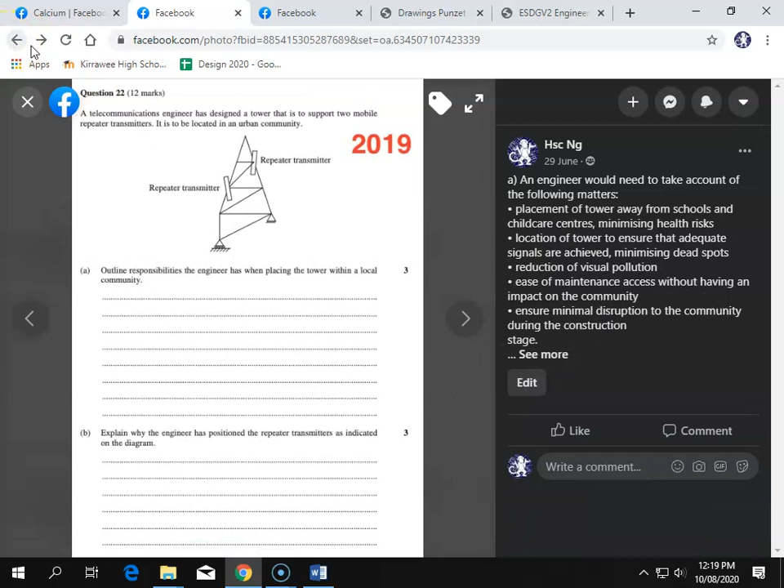Then, once we pass it through point C, once it goes through this fixed capacitor, we can smooth out the wave, right? Smoothing out the wave removes the high and low component. Passing through C acts to smooth out the wave, giving us this line. And that then gives us a signal which can be played as audio.

Okay, so at this point, given the HSC precedent, I would say it's very, very unlikely that you'll ever get a question on FM radio, right?

I don't know anything about FM radio. I'm going to say that, on a recording that I may or may not put on the internet.

And I would argue that given the syllabus, right, the syllabus says demonstrates basic understanding. I'm not going to get the syllabus up just to prove this point, but the syllabus says something along the lines of demonstrates basic understanding of radio modulation, right? This is a basic understanding of modulation. Obviously, we need to be able to understand how other things modulate.

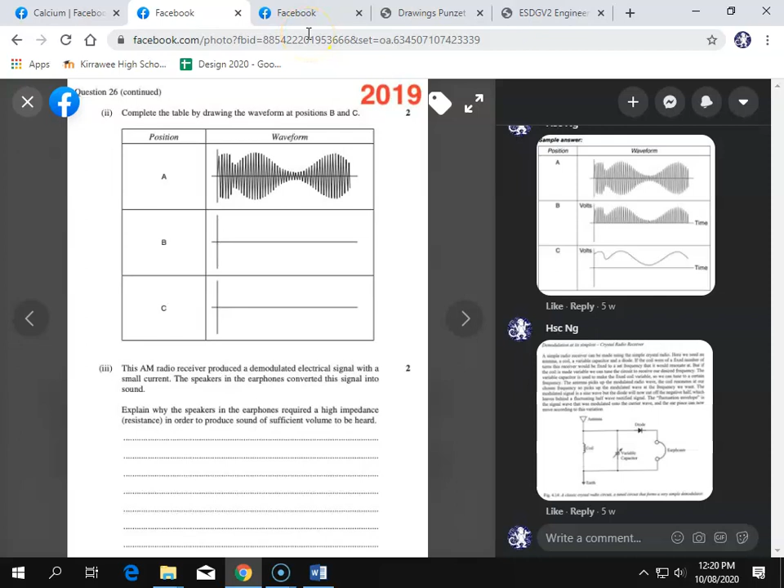And in the past, and if you're listening to this, I'm pretty sure other YouTube videos that I've posted have talked about other forms of modulation. I just thought this was a more interesting and a more difficult question that's going to be more challenging for you, give you a better idea of what to prepare for the HSC. Okay.

Okay. Explain 2 advantages of optical fiber over copper wire for telecommunications. Again, we have the explain as cause and effect. So it's pretty similar to what we talked about with drones. The only difference here is I explain 2 advantages. So, does anyone want to give me one? Okay, a lot of people said bandwidth, right?

Bandwidth comes in many ways. You could talk about, you can send more signal. You can send faster signal. It doesn't matter if you send more signal. It doesn't matter if you send faster signal. What matters is how many words per minute can I transmit across this signal, right? How many images can I transmit in this signal? How much data, how many ones and zeros can I put through this signal?

Now, when we talk about bandwidth, we can talk about bandwidth per unit of area, right? We can say how much internet can I push through per 100 millimeter diameter, right? That's a question. Or you can say how much internet can I push through per dollar of cable, right? That's another way of phrasing it. How much data can I push through per dollar of cable? You could also say that the signal just travels faster through, as light travels faster than electricity, right?

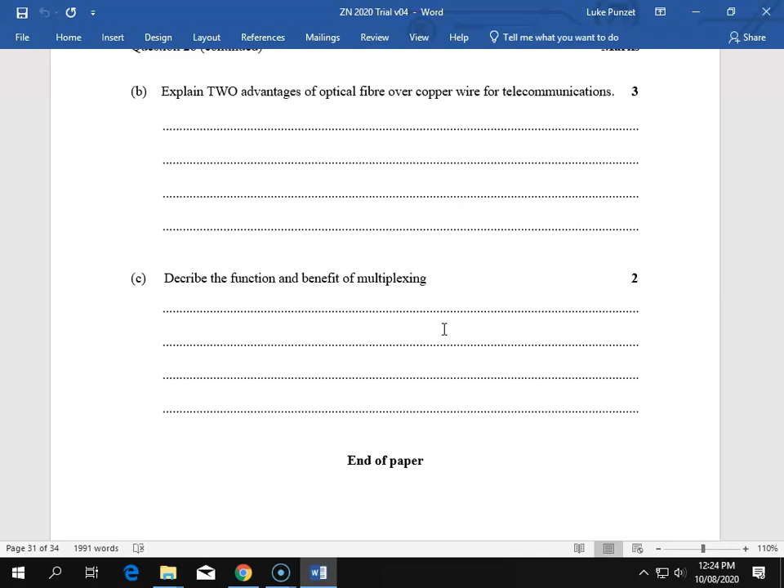What is the benefit? The benefit is we can have increased bandwidth, right? The benefit is that we can have more signal, we can have more internet, we can send more cat videos on the same signal. Now, in terms of optical fiber, I asked you to do homework on this, where I talked about there's 3 types of optical fiber that we use. What are they? Let's see how quickly I can find it in the textbook before the bell. Can we do it this time?

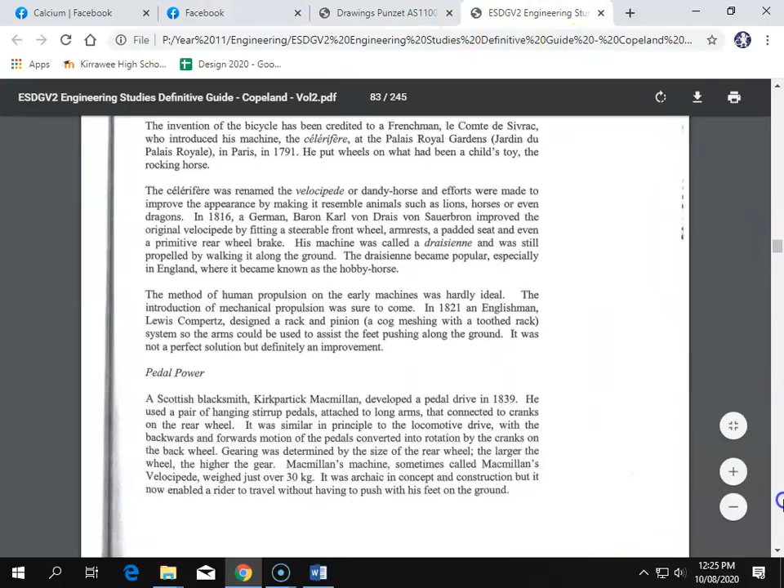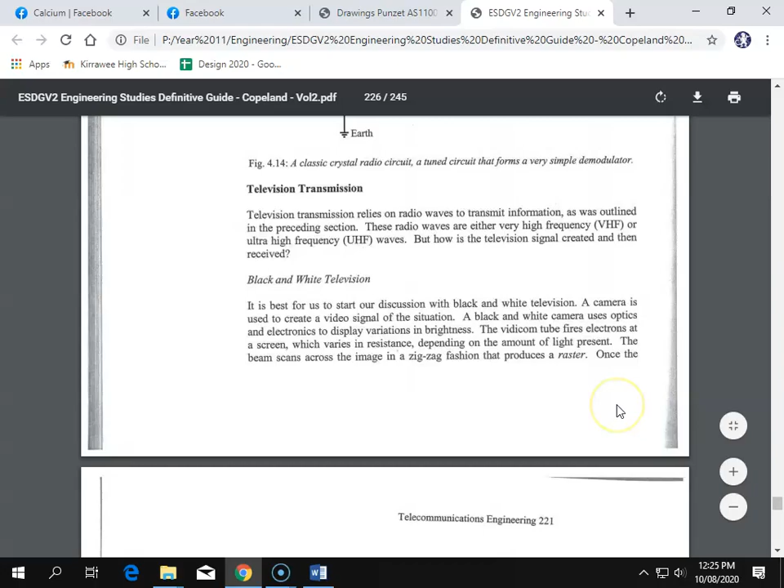Yes. Okay. Stepped index, graded index, and mono. What do they call the mono one? Okay, here we go. Single mode fiber optic, stepped index, and graded index. Basically, no one really uses stepped index. We use mono and graded.